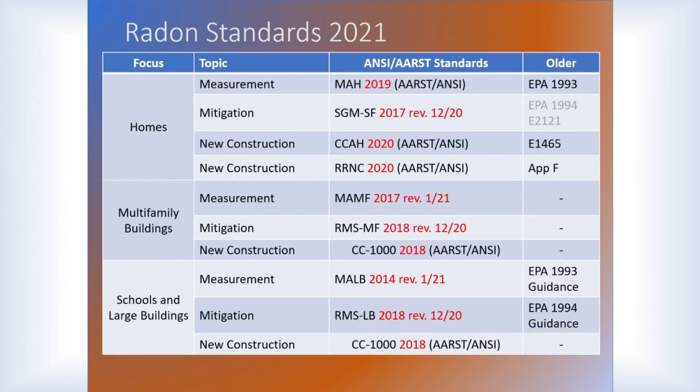These are, you'll notice, in revisions on most things. Most every date on these different standards is within the last 3 years of revision of one sort or another. That's kind of the status where we are.

And here's where the trust comes in. I am not so pretty that the HUD people say, 'yeah Gary, bring it in, we love your stuff,' or that nobody paid money under the table for this. That's not how this works. They trust what we did, or they wouldn't be recommending all these standards we did. That's how this works.

It's no different than when you go to clients to sell a service, and you have to gain their trust, or they don't buy in.

Now, to understand what's going on in the classroom: how many people have done or are involved in doing multifamily schools, large buildings? How many people in the room are in that game? Okay, good. How many people in the room for vapor intrusion in one way or another?

So this is supposed to be on large buildings, but it really ends up being kind of a status report of where we are, because we're merging, harmonizing, and doing work on all 3 of these mitigation standards. The 2 on your right are the large building standards, and the single families are on the left.

All of this built on EPA stuff since the 1990s, the science that was done then. Each of these standards was created by different groups of people, and then and now we've learned a lot over those years, just by trial and error, and that comes into that.

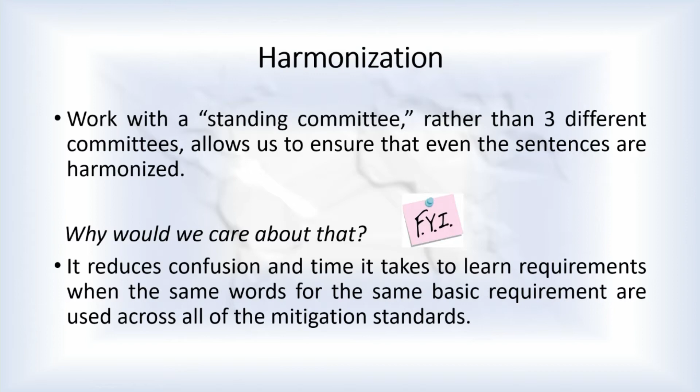So that's the type of work we're doing, as well as this. One of the stakeholders in our community are the clients, people who inspect systems. We heard about the inspection credential earlier, but this is a different ballgame. In our previous standards we tried to give requirements that were reasonable and added sentences that explained them along the way so it didn't seem so foreign. However, we found that guidance sentences stated right next to the requirement cause confusion.

I now have proof of that from that exam question. It's taking forever to get anything agreed to when all we're looking at is the shall statements. They're bold, they're crude, they're unfriendly, and yet from the standpoint of compliance inspectors, they relieve all the confusion.

Another one of those FYIs: why would it be important to have prescriptive language or performance-based language? It adds clarity when you're designing things, and there's no muddled up text. It reduces confusion for people inspecting, like homeowners and other inspectors, and it also improves the ability for more jurisdictions to adopt standards, thereby increasing radon awareness.

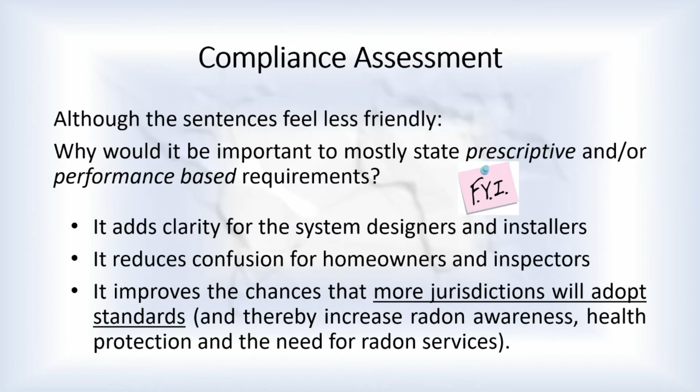The people who raised their hands saying they work on large buildings have now graduated into this thing where you might even have a retirement plan, compared to guys like us who only worked on single-family homes. You can actually make some money in this. You can lose money too, you've got to remember that. If you could make $100,000 on one project and lose $100,000 on the next, that's this game. But it's all part of that.

So I'm trying to move along quickly to catch up on schedule. We made an update publication to all of these standards where we harmonized things and put it out last year, early in the year. Some of the basic things were content reorganization, so they all had the same chapter name for the same topic. We're looking ahead to 2022 publications, but we mostly harmonized and made sure we got most of the ASD sections harmonized, so most of that across there is the same text for the same task.

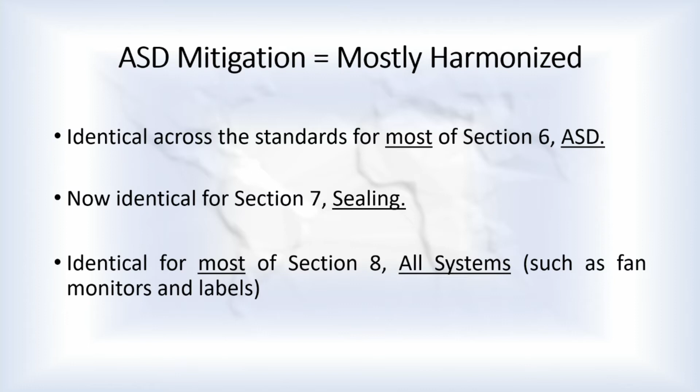And the sealing section is now identical. We've got a few things left in ASD and a few improvements to make there too, but most of Section 8 of the all systems, such as fan monitors and labeling—you've heard discussion about the labeling in previous presentations here—I'm jumping right to one of the things that wouldn't be known even though it's published, not really known well.

I wanted to explain it. This is a new situation on exhausts. To understand it, this is from ASHRAE 62.1, based on a study that cost big bucks that somebody did. In their study, on the right is a box.

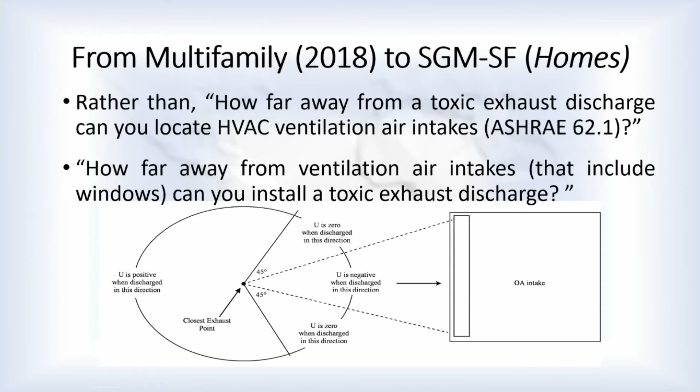It's an HVAC system with a motorized air intake. They studied how close they could locate that motorized air intake to an exhaust plume rated as kicking out some very toxic plumes, and they've got all the calculations—this organization has a million equations, you can calculate everything, just like some other organizations. The inverse is, how close can we put the exhaust plume to the air intake? This is how the calculations were worked out.

What we've got here was published in 2018 for multifamily buildings, but it's now in single family too, so it's harmonized over. This is only a two-dimensional picture, but what you're really looking at is a three-dimensional cone of exhaust coming off of the exhaust point.

The gray areas in that cone, the center portion where it shoots further distance, and then off to the side at the 45-degree axis - these are all places where the pollutant or radon is more potent and stays in what they call a Gaussian plume.

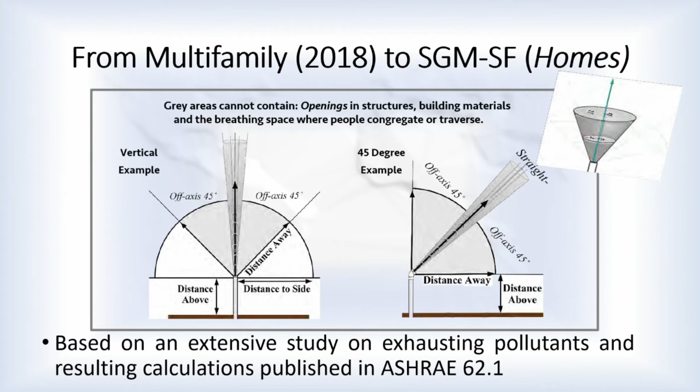That air cannot strike openings in structures, building materials, or breathing spaces where people may congregate or traverse. If you think of the vapor intrusion throwing vapors out here, all of that's important. Hitting building materials can rot the building, or you could shoot it up into the joists underneath an eave. As some studies found, 40 picocuries ended up inside because of a slit along the side of the roof - so you just point it differently.

Now it ends up those calculations are about the same as we've had for 30 years - pretty much the 10-foot, 2-foot rule distances, but you're thinking of a cone-shaped spread of air rather than just that. So we're still requiring going above the edge of the roof, however we have allowances with caveat requirements for going below the edge of the roof.

Why would that be important for a 30-story building? We don't want to have to take a pipe 10 stories up if there's a place we can safely discharge it lower. But there's caveats - in this drawing to the right, I remember having a code discussion with a guy who's there for electricity, but he wanted to write up the exhaust too because it might let rain down inside. And I said, no, here's a picture.

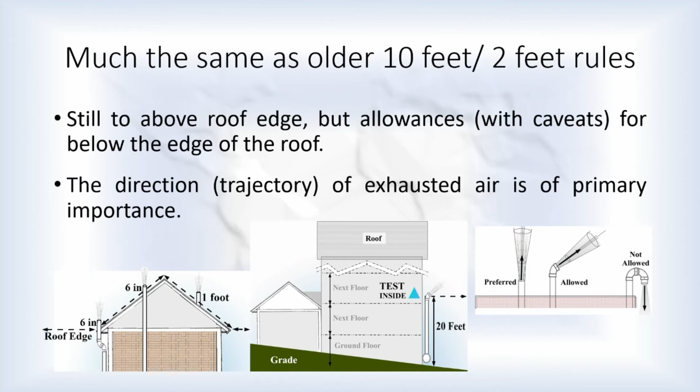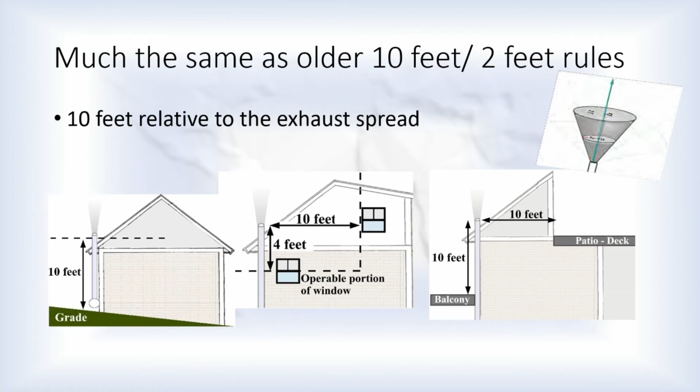Any event, 10 foot relative to the exhaust spread. These pictures aren't showing that really, but it's pointing out 10 foot above ground, 10 feet to the sides of windows, 10 feet away from people on the side of a deck, 10 feet above people in the lower deck below it, and that sort of thing. There was one thing in that picture I was pointing out.

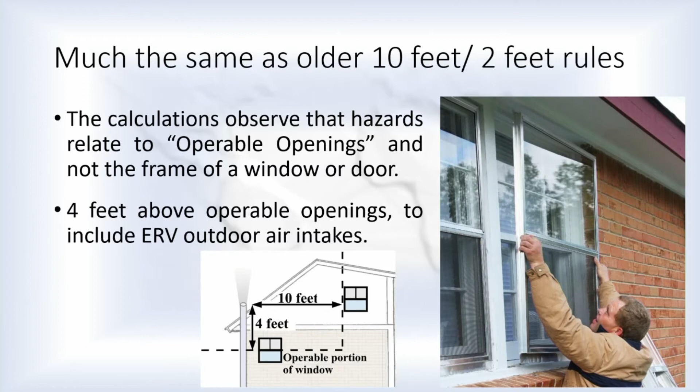The one change has to do with above the windows, if you will. It's a 4-foot rule, however it's not 4 foot above the window frame - it's just like that drawing where the mechanical air intake is sucking air in. It's 4 foot away from where the air is going in, which is the window. Doors and things may have it different, but a very common thing is storm windows closing off half of that, so it's 4 foot above the edge of the lower window that gets opened all the time. That's how those calculations worked out - so it's still pretty much the same.

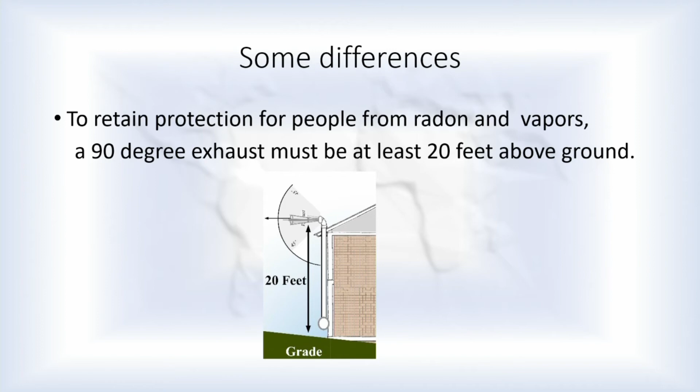This one here, if you think of doing a 90-degree exhaust, this does have the circular pattern of where the spread is. Essentially we don't want any of that exhaust, even off to the side at 45 degrees, to be hitting people in the head with radon or vapor chemicals. So a 90-degree exit needs to get up 20 feet in the air, even if it's above the roof.

So these are some things I thought I'd make sure I covered with you because it affects large buildings, but it affects most everything you'd be doing - it's very much the same. It gets real easy later to go 'oh yeah, my finger, I just point it, and I know where it's okay to point this stuff.'

But the calculations work out that if you're doing larger than 3 or 4 inch exhausts, where you can be moving 2 or 3 times more air at 2 or 3 times further distance, these numbers increase. You may have to end up 20 feet to the side of a window if you're blowing out a 10-inch pipe. The minimum you could blow straight across to another house at their windows is 20 feet, but if you're blowing that much air out of a 10-inch or 8-inch, you may need to be 40 feet away from that house before it turns and blows over at it.

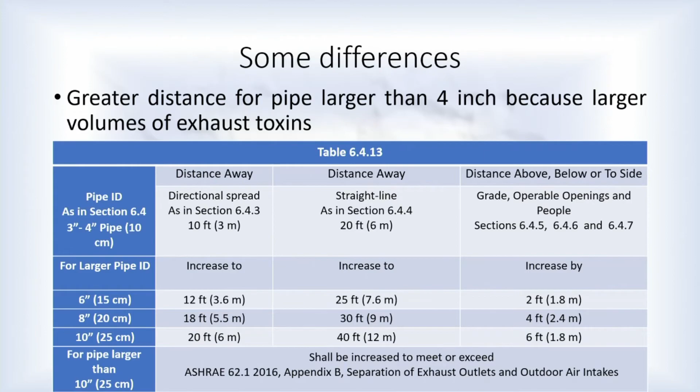So I just wanted to cover that because it's one of the ones that probably people haven't had training classes on before, because of how hard it is to get all of this over, along with the training and all the new credential delays and complications.

Other things in there - owner-occupied maintenance is different from independent maintenance, so there's a bunch of stuff breaking off that way. It's not really so much whether it's a single-family building or multifamily - when you're getting into your documentation, who is the person who's going to read it? So if it's someone doing independent maintenance, or maintenance by the school district, it's different documentation than what you give the homeowner.

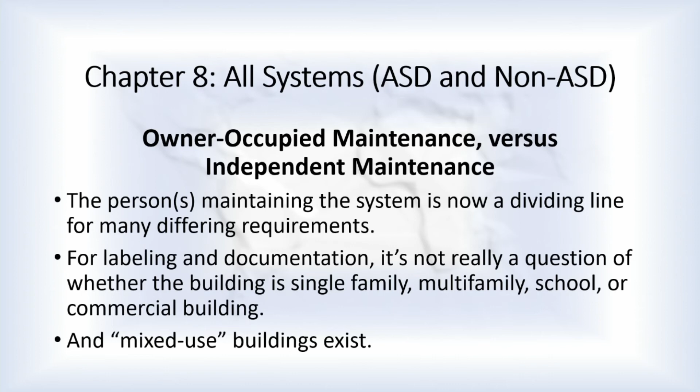Pretty much the same content, but they call it the O&M manual rather than an information packet. The beloved active alert monitors—how many people beloved the active alert monitor idea? I'm not seeing any raised hands.

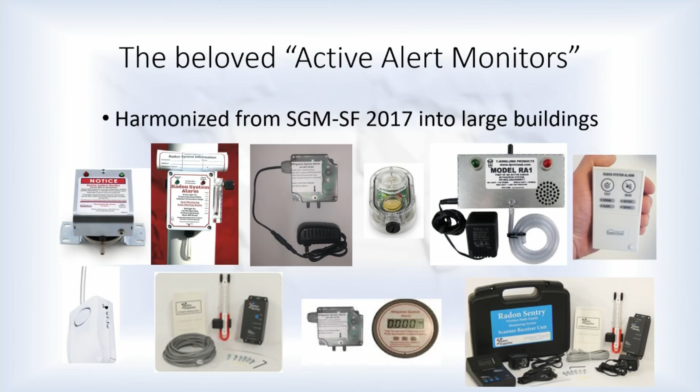Well, we have plenty of products now. There's about 5 more I've seen over next door than I took these pictures of. This harmonizes from the single family standard over to the large building standard, okay? And I think it's worth giving some history on how this happened.

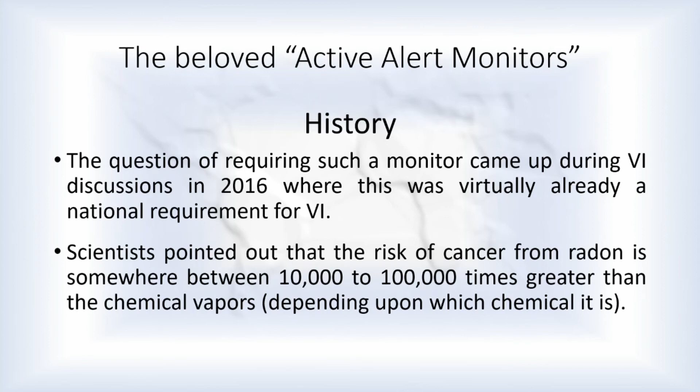This came up during vapor intrusion discussions where virtually a national requirement for all vapor intrusion. For the scientists that were there, you heard earlier about some of the differences, how much more dangerous radon is. Every concern that's on your mind has been argued at least twice between this group. We're a very vocal group, takes forever to get a lot of things done. And yeah, it's going to be a while. Part of it was going to be a while for having good products that you trust and that work for you, before anybody in a field, a realtor ever says, I got gypped because I don't have my monitor.

But it's, as verified here, we've got 10 different ballots across 4 different committees across 5 years, and this consensus remains strong. We all know the situations of going in, the inspector said the fan needs replaced. I don't know why, because the radon's 0. Look at this gauge, it's a 0 radon. How could it be there? We all know hundreds of times, at least I've hundreds of times, heard those types of things, and most people have.

We're getting again into some of the trust areas, the improvement of the industry, and the ongoing question at this point for those committees is, should there be more requirements on these? And yet the product improvement is actually in your hands. It has to do with you contacting or choosing by which ones you purchase, whether or not you get a good product that works.

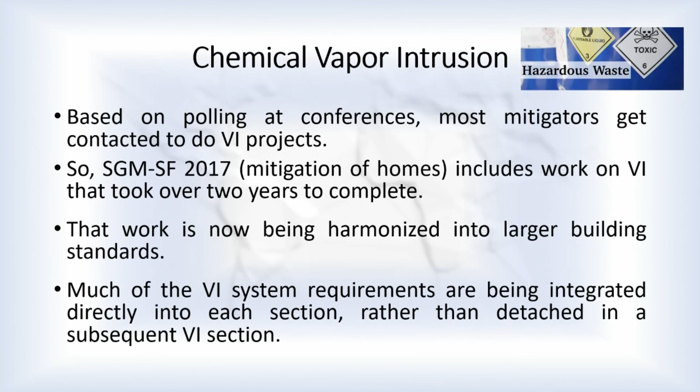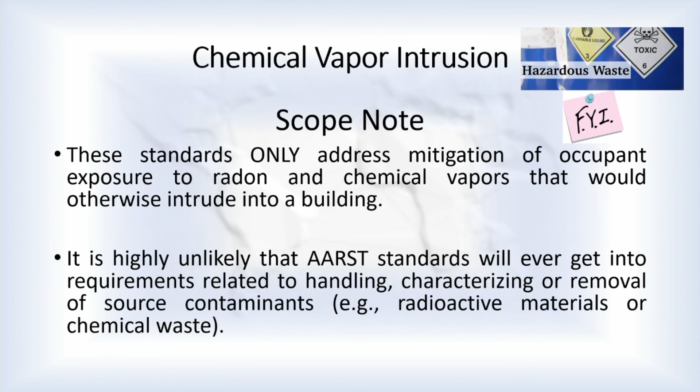How many people—I asked about chemical vapor intrusion. One last thing, FYI for your exam: the standards relative to chemical vapor intrusion only address the mitigation of occupant exposure to radon and chemical vapors that would otherwise intrude into the building. We're not ever, I don't think, going to get into the business of characterization, handling, removal of source contaminants below—the whole soil vapor extraction thing. But we can keep those people protected in the buildings. And I think I'm out of time, and it's time to stop. Thank you very much.